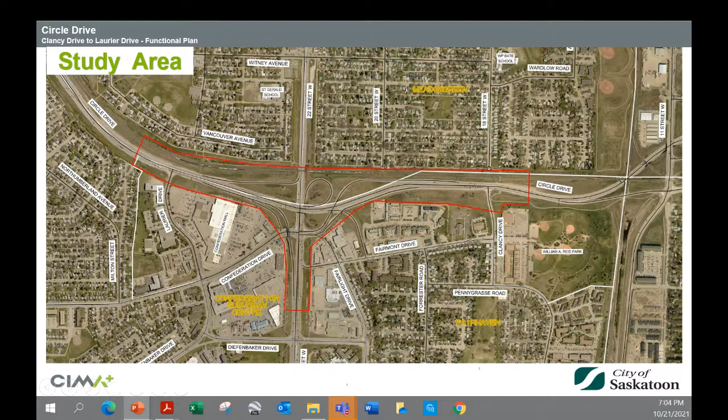So the open house purpose is obviously to present the recommended plan. We want to share some of the changes that were made following open house 2, where we presented a preferred plan, as we called it at the time, and to respond to final questions.

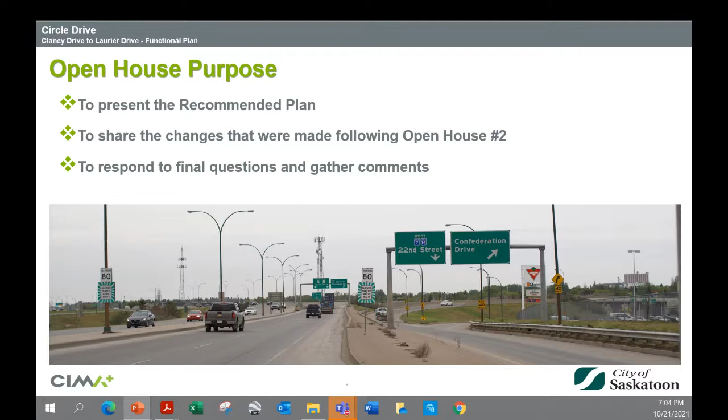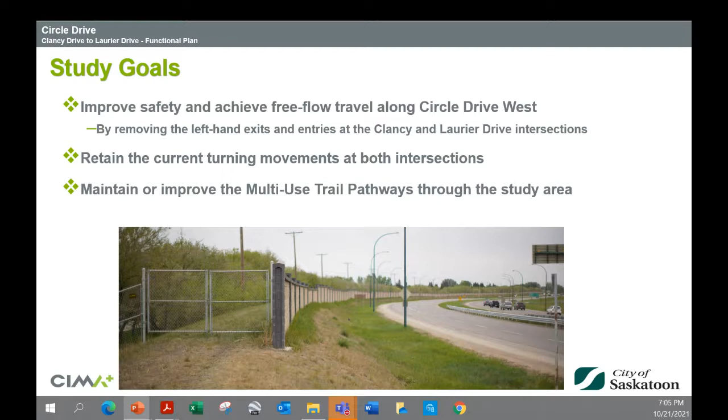And gather comments. So a reminder of the study goals: improving safety and achieving free flow travel along Circle Drive West. That would be accomplished by removing the left-hand exits and entries that occur at the Clancy Drive and Laurier Drive intersections. We wanted to retain the current turning movements at both those two intersections, and we wanted to, at the same time, maintain or improve the multi-use trail pathways through the study area.

So our study scope, what was involved in development of the long-term plan, and again, the freeway plan along Circle Drive West: upgrading the Circle Drive 22nd Street interchange, upgrading the 22nd Street Confederation Drive intersection, which is right alongside the interchange. Again, preserving and improving the multi-use trail pathway network in the study area.

And what got added to our work along the way was an interim change to the 11th Street interchange, because we had to restore a southbound access from Circle Drive. So we ended up extending a little bit towards the south.

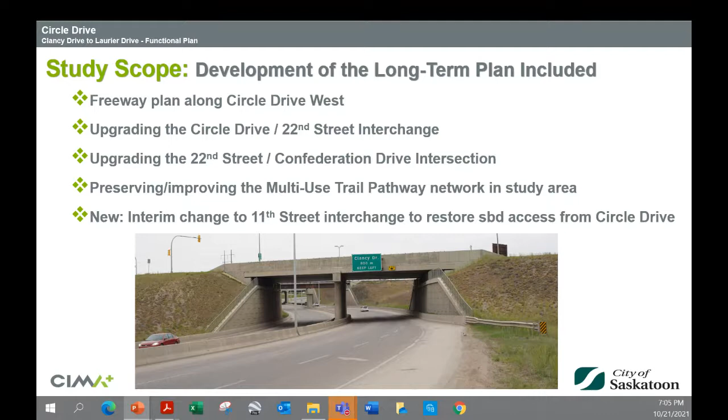Work that was not included in what we were asked to do includes the ultimate Circle Drive 11th Street interchange configuration. Although options have been considered by a separate city study, and we will show you what that looks like a little later on. The railway grade separations that would be necessary in and around the interchange area at 11th, and the 22nd Street Diefenbaker Drive intersection upgrading.

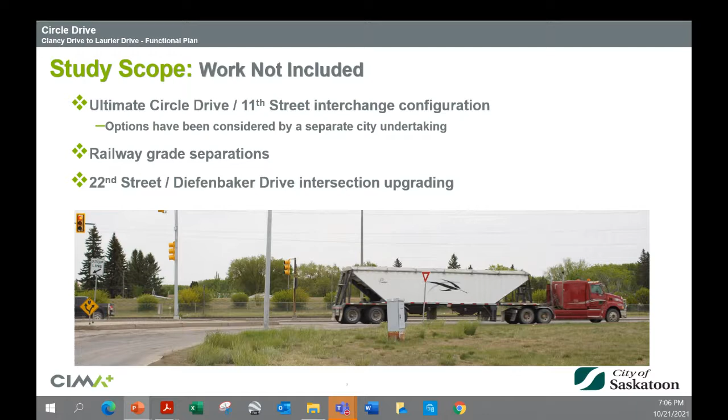So a little overview of the study process and timeline. This has gone on much longer than anyone would have expected.

Open House 1 was held in June 2019, where we spent time gathering the existing conditions and consulting with the community. Open House 2 in January 2020, we presented the preferred plan and invited public input in response to that plan. Then the unexpected part of our study process was the COVID-19 pandemic from March 2020 to September and still ongoing. A public engagement process was paused at that point. But the preferred plan was modified in response to the public input. And so here we are at Open House 3, presenting the recommended plan again, to respond to final questions and gather comments. This, if things can proceed, will lead to City Council approval in spring 2022.

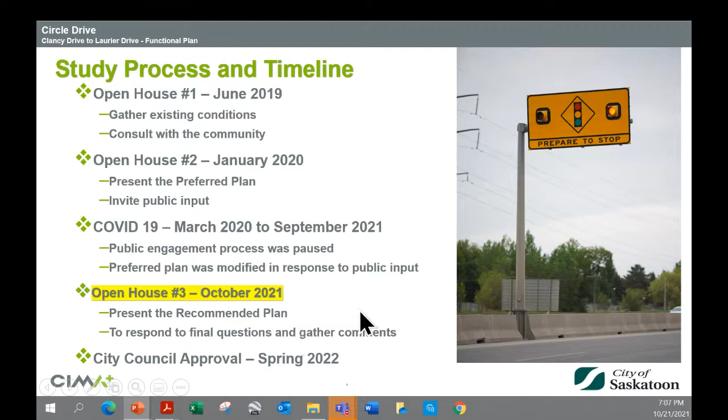So we'll start with some panels that describe the study background, starting with Circle Drive's overall role. It's a core route, an urban ring road in the City of Saskatoon's road network. It supports travel within and through the city. It will ultimately serve as a southwest leg of the proposed Saskatoon freeway. And as a ring road and freeway facility, it would normally only serve longer trip lengths. It's not meant to be a facility which you hop on and hop off, making short trips. Ideally, Circle Drive would only connect with key network roads if there was a do-over going on here, at 11th Street, 22nd Street, and 33rd Street. That's what that facility should look like as a freeway.

So again, study background. One of the things we had to consider was looking at what the traffic volumes might be in future planning horizons. So the future growth had to be considered in developing long-term system requirements.

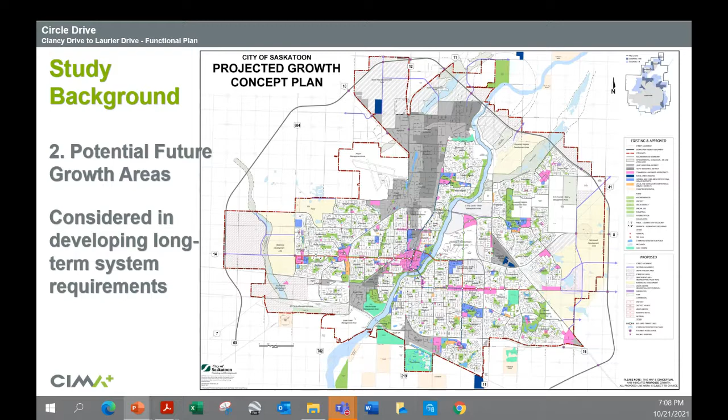And again, in study background, thinking about helping us understand what the freeway wants to be, what role does Circle Drive play again? So the future Saskatoon freeway, which is this outside line here, doesn't include a southwest leg crossing the South Saskatchewan River.

So 22nd Street, which begins outside the city as Highway 14, is one of several spokes connecting the future Saskatoon freeway with, in the case of 22nd Street, Highway 7 and 14, with the Circle Drive Ring Road. And so the point we're going to be making is that this connection is, for all intents and purposes, part of the ring road. Ultimately, there's only 3/4 of a ring road. So, with that, existing Circle Drive connects 7, 14, and 60 west, with highways 11 and 12 north.

Neault Road connects those same westerly highways with Highway 16 north. That's Neault Road right here. And Neault Road, 22nd Street and Circle Drive connect Highway 16 north, again up here, with Circle Drive, southwest Circle Drive, and ultimately again the other provincial highways.

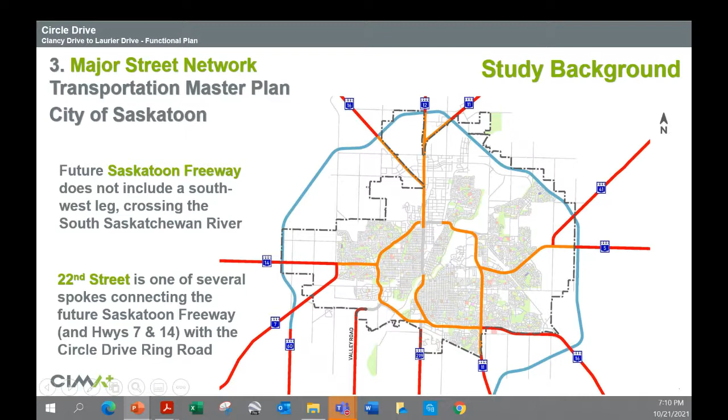And these same observations are documented on this panel, but I won't read them again. So although, I will go back and emphasize from a problem statement perspective, as we try to define what it is we're trying to fix, the highway network is what I just described for you. And these are the bullets I went through.

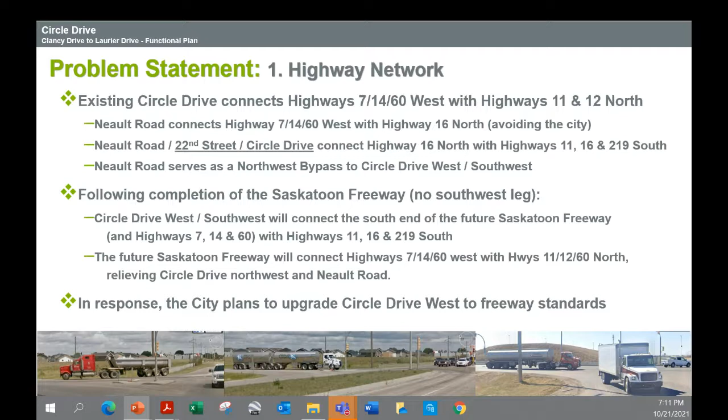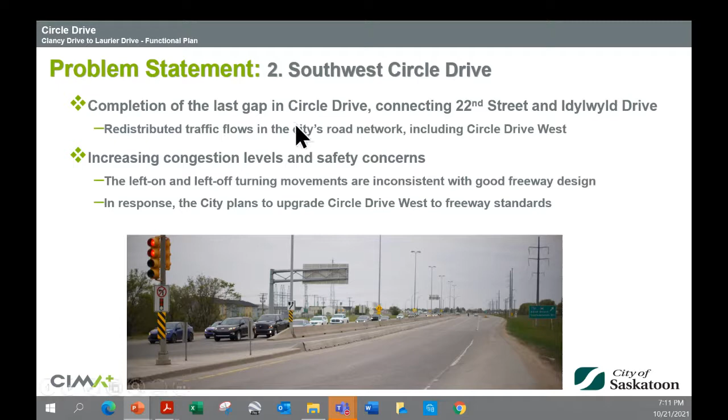So part 2 of the problem statement is Southwest Circle Drive. So it completes the last gap at Circle Drive, which the city undertook, connecting 22nd Street and Idylwyld Drive. That redistributed the traffic flows in the city's road network, which includes obviously Circle Drive West. So those increasing congestion levels and safety concerns, the left-on and left-off turning movements are inconsistent with good freeway design and becoming more problematic with the increasing volumes. And so in response to that, the city plans to upgrade Circle Drive West to freeway standards.

Now part 3 of our problem statement, focusing on the mix of the right hand, which are the freeway exits and entrances, and the left hand, which are the expressway exits and entrances. That can challenge driver behavior and lead to poor safety outcomes. It's where you will often find truck traffic in both lanes as they think about which side of the highway, which side of the roadway they need to exit from.

So then looking at the Circle Drive segments, what the design standards are today and what the approximate lengths of these sections are, starting with Circle Drive East, which is Highway 11 south of the river to 11th Street. That's already a freeway, that's 10 kilometers. From 11th to 22nd, we have a signalized Clancy intersection in between, approximately 1 kilometer. Crossing 22nd Street, we have an interchange, so that's part of Circle Drive that wants to be a freeway.

From 22nd Street to 33rd, in the middle of that we have a signalized Laurier, again approximately 1 kilometer length. Then crossing 33rd Street, again an interchange, again a section of it that's waiting to become a freeway. And then from 33rd Street to Idylwyld Drive, Highway 11 on the north, again signalized Airport and Avenue C.

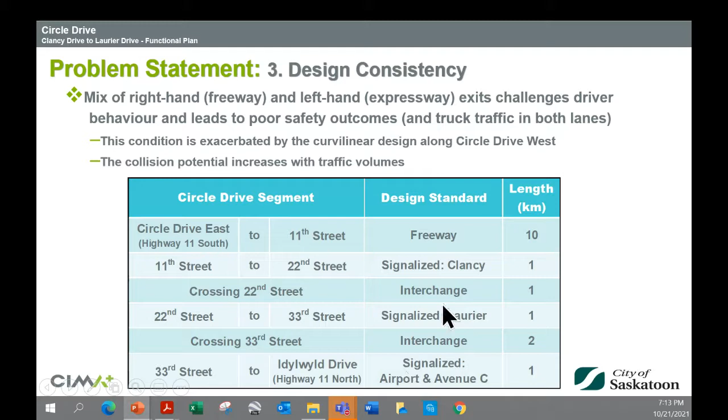So looking at some of the problem areas or constraints as they exist right in the study area. Let me just catch up here.

So first of all, the interchange spacing, where best practices would have interchange spacing from 22nd Street either to 11th, or 22nd Street to 33rd, that's where you're going to get spacing between 1.5 and 2 kilometers. But today we have 600 meters from 22nd Street to Laurier and between 800 and 900 meters to Clancy. So that certainly falls far short of what we would need to build a suitably designed freeway.

Cost-effective design here would simply close those 2 intersections. They would disappear, and again we'd have 11th, 22nd, and 33rd.

Again, the existing Circle Drive 22nd Street interchange configuration is unusual. If you come up 22nd, you follow a loop ramp, a very small loop ramp, to get you around to Circle Drive North, to the north side of the city. The return movement from Circle Drive coming southbound, you have a ramp which takes you straight onto 22nd Street. So the design of that interchange was configured for 22nd Street West to Circle Drive North, Highway 14, and 22nd Street to Circle Drive and the other highway connections.

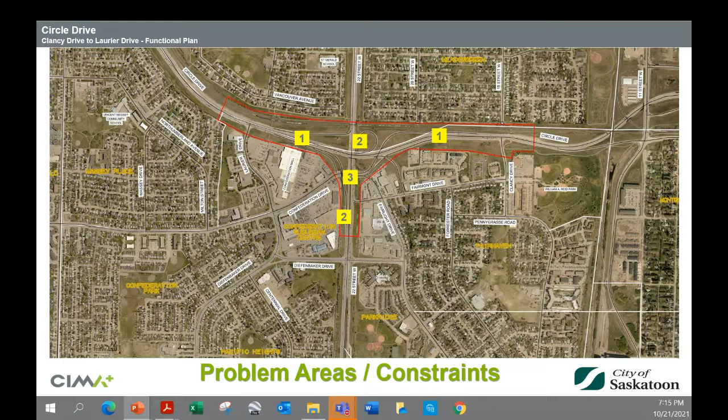So given the congestion here, one of the reasons why these two intersections are being used as they are is by local residents who are accustomed to the travel patterns they enjoy today. And so those were the bullets I just went through.

So now to define what we call the planning and design context for Circle Drive: design of high-speed roadways requires baseline geometric and safety standards, and those standards must be applied consistently to achieve best practices and the safety you need for a road like that. Circle Drive's design parameters are defined by its role in the city's overall network, as I showed you earlier. So Circle Drive must achieve the corresponding design consistency to be a safe facility.

So to achieve freeway standards and retain all current movements along Circle Drive, again two of the study goals come out there, would require highly complex and costly measures and would impact right-of-way requirements from adjacent businesses or residences, etc., as well as, or instead, the power transmission and CNR lines. So this is what impacts our study goals.

So we'll go back now and try to summarize some of the public input that we've heard at and following Open House 2. Probably one of the bigger concerns we heard was neighborhood access and egress and business access. So the concern there is reduced access at Laurier and Clancy drives, increasing travel times. And with that, a concern about revised business access to the west side of Circle Drive. Our response is that upgrading from expressway to freeway standards commonly results in changes in travel patterns, particularly when you see the very close intersection spacing we have along existing Circle Drive.

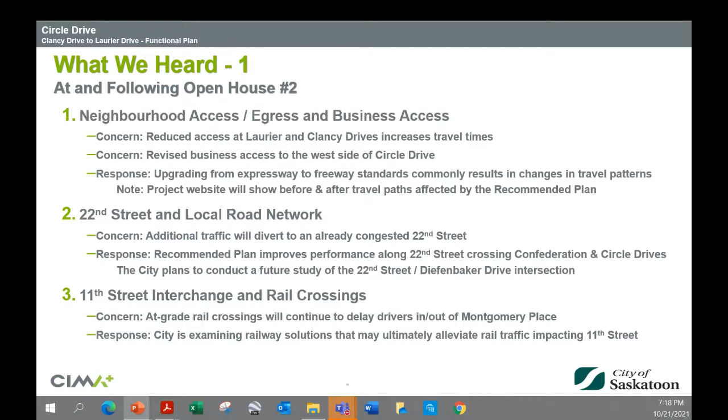Continuing with what we heard, noise attenuation was another concern, specifically improved attenuation for Meadowgreen and Montgomery Place, and possibly others. The response is that the city has asked us, CIMA Plus, to undertake noise analysis to identify locations warranting additional mitigation, and the noise study findings will be posted on the project website.

Another concern we heard was safety, involving opinions both for and against removing the two traffic signals, with concern that diverted traffic could result in busier school zones. The response is that the city will monitor traffic flows to ensure appropriate traffic control measures are in place where changes in flow create a problem of some kind.

Another concern was free flow Circle Drive, not too far removed from the safety concerns. Again, there were opinions for and against removing the two traffic signals to achieve a free flow facility, and opinions for and against upgrading Circle Drive, with challenges recognized that the city might face along Circle Drive North. The response is that the city will conduct future studies to assess Circle Drive North, but the need to improve the performance of Circle Drive West and its connection to the south does not hinge on what happens with Circle Drive North.

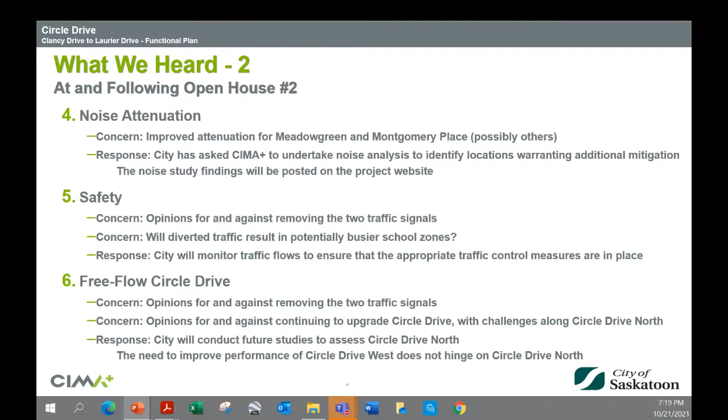Continuing with what we heard, emergency access was a concern—specifically, will emergency access to area neighborhoods be affected? Our response is that EMS input has been sought to ensure suitable access is maintained, so we're not losing sight of what that will require.

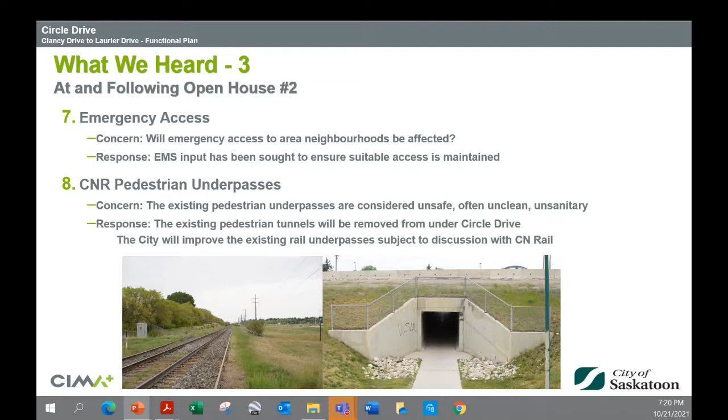Lastly, the CNR pedestrian underpasses. The concern is that the existing pedestrian underpasses are considered unsafe, often unclean and unsanitary. The response is that the existing pedestrian tunnels under Circle Drive will be removed by the recommended plan, and the city will improve the existing rail underpasses, subject to discussion with CN Rail. It wasn't something we could accomplish with what we're doing, as the overhead power lines prevent something extending across the road and rail at the same time.

So here's the previously preferred plan—this is what we showed you at Open House 2. The numbers on there correspond with some of the changes we've made since this plan was first shown.

If you follow the numbers on that plan: number 1, we've added a ramp from 22nd Street eastbound to Circle Drive southbound. This came to us as a request, as people brought to our attention the higher volumes, particularly with Nault Road and the truck traffic coming in from the west. This seemed like a prudent change to make, and this ramp utilizes the existing structures that are there today, so it was a fairly simple ramp to add. For truck traffic coming in from the west, it avoids the trucks having to go through the signal at Confederation, and they don't have to hit the signal at Circle Drive. So it's very efficient, and we think a safe improvement.

Number 2 is revised connections to Fairmont Drive from 22nd Street eastbound. Today you can come out of Fairmont Drive and go this way to the north. One of the problems drivers have experienced is a desire to make a left turn at Confederation, so different measures have been in place at different times to try to prevent that—it simply wasn't a safe weaving maneuver over far too short a distance. So this is now an exit from 22nd Street into Fairmont Drive, which helps replace the movement that no longer exists here.

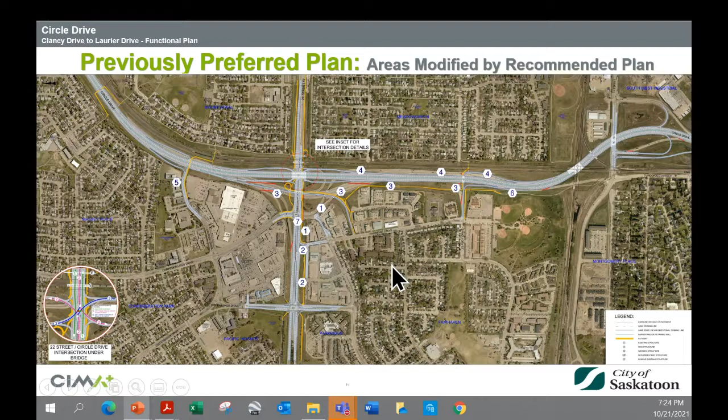And we've added a dual left turn from eastbound 22nd to northbound Confederation Drive, so it's a double left turn lane here. So those are the changes we made since Open House 2, and there may be some more subtle changes.

So starting with the recommended plan, this is one I'm hoping most of you have had an opportunity to look at, because it's been on the city's project website. And so this now reflects all of those changes I was just telling you about.

The all movement—for example, one thing I'll point out, it used to be that if you were coming down Circle Drive and wanted to go east towards downtown, you had to exit onto Fairmont and do what's called a jug handle left turn, come around here, and that's what this little ramp accomplished for you. Now you simply exit here and go this way.

And it used to be that this ramp took you over top of Confederation Drive. Now you simply make the right turn and you've got sufficient distance to merge to the left and make a left turn. And if you come off this way, this also used to be a connection directly to Confederation Drive. Now you make this exit and you have a dedicated auxiliary lane to take you straight into the mall. So it's a free flow lane sitting outside the core lanes. So that's just some of the changes that have happened here with this new design.

As well on this side, this ramp could no longer exist with the Clancy Drive on ramp—they overlapped each other, that wasn't going to work. So this is the change we've made. It's at 11th Street. You now have this loop ramp to exit onto 11th Street from Circle Drive southbound. And the on ramp moved a little bit, but the same maneuver is there.

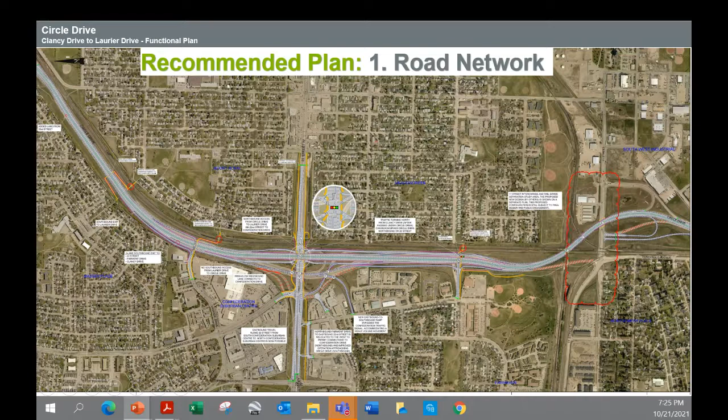So this is an update of the cross sections we showed you at Open House 2. Along the bottom we have three: cross section A is this one here, cross section B is on the next panel, cross section C is the third one. This shows you Circle Drive just south of Clancy. So Circle Drive goes over and Clancy Drive will go under. So these are the ramps you see traveling in both directions on either side, and this gives you an appreciation of where the road sits relative to the terrain around it.

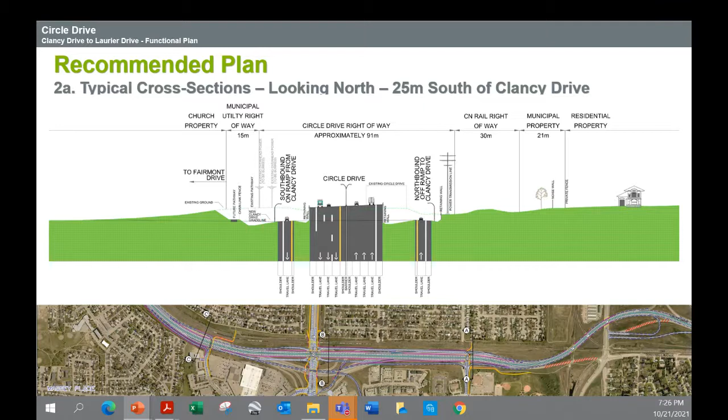This is the cross section just immediately south of 22nd Street, again through Circle Drive. Now you're seeing the two ramps on either side of Circle Drive, and these are the ramps that utilize the old bridges. If you look at this, you'll see that these lanes right here represent the lanes going over top of 22nd using the old bridges. This is where the interchange was. This is where the interchange will be today.

This is 22nd Street, Circle Drive just north of Laurier. Laurier goes over top of Circle Drive, and this is where we had to change some of the driveways because we're beginning to elevate. These are the ramps, or the CD roads, on either side that you're seeing. Again, it gives you an appreciation of power lines, CN rail right-of-way, and where the nearest house might be, and the church property on the other side.

So this is the future railway grade separation concept prepared by another team for the city. Here it comes off of, so north is to the top. This is 11th Street, swinging to the south. There's the ramps that we showed you being changed in our design. Now we're crossing over the railway lines and back onto 11th Street, and this is a connection to the local road, parallel to the rail line. So again, this ultimately would be how the grade separation would be accomplished for the rail lines, so that if you're exiting at 11th, you're not waiting for trains crossing the road.

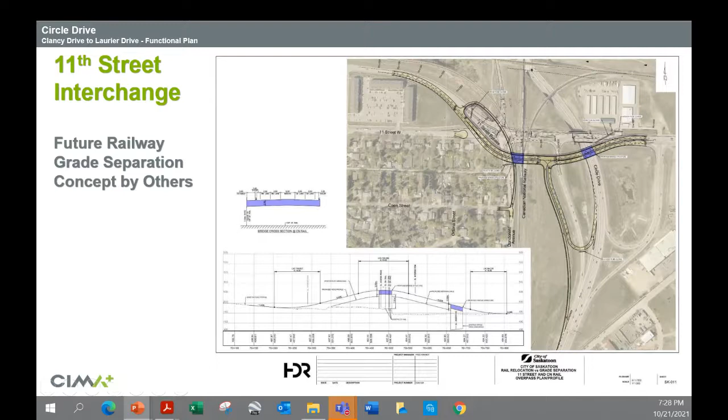So this shows you the multi-use trail pathways, and all of the brightly colored lines are all new portions of trail, beginning with the three pedestrian crossings. Again, there is already multi-use trail on this side, pathway on this side. There's now a new pathway here, new structure underneath this ramp, and then you cross under Circle Drive on both sides with the roadway, and then pathways on both sides. New pathway down here. This got moved because of Circle Drive, and we go under Circle Drive here. Where do they go? Under Circle Drive, and then we still have the railway crossing to be improved at some future point as the city engages with CN Rail.

And this one here, likewise, we go over top of Circle Drive, parallel along with the Laurier structure. Come back down, but we still have the old CNR crossing to contend with. And finally, the last one, long ramp to get up, across, back down.

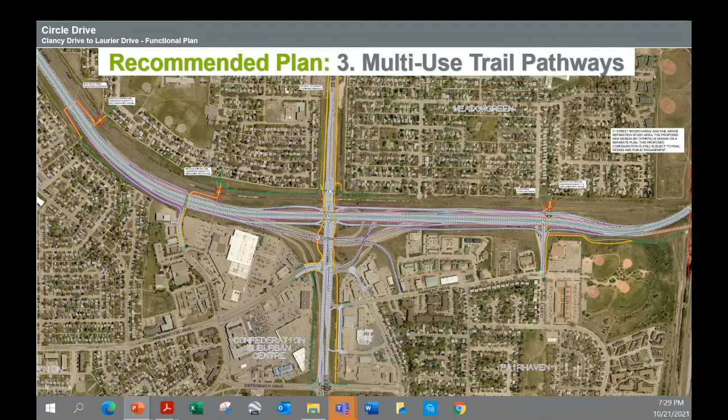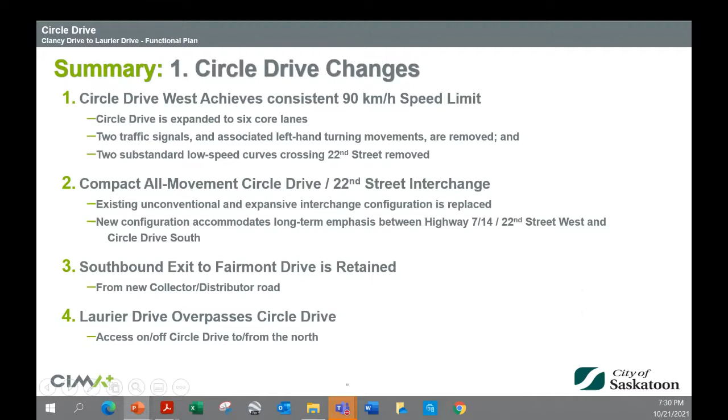Southbound exit to Fairmont Drive is retained from the new collector distributor road. The Laurier Drive overpasses Circle Drive, with access on-off Circle Drive to/from the north. Clancy Drive underpasses Circle Drive, all movements on-off Circle Drive, as well as a new access provided from eastbound Clancy Drive to 22nd Street eastbound via a CD road.

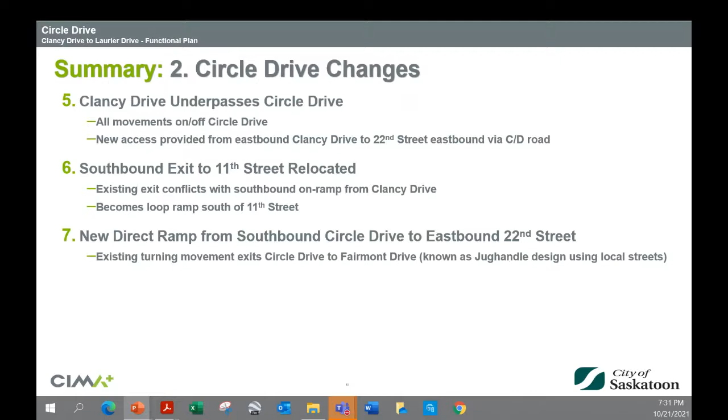The southbound exit to 11th Street, as we mentioned, has been relocated. The existing exit conflicts with the southbound on-ramp from Clancy. It becomes a loop ramp south of 11th, and then there's a new direct ramp from southbound Circle to eastbound 22nd. The existing turning movement exits Circle Drive to Fairmont Drive, which again is known as a jug handle design, and that disappears. That just becomes an access to the whole Fairmont area.

So a comparison now of 22nd Street, existing conditions.

So along 22nd Street, this section is still 4 lanes, 2 each way. This is now 6 core lanes, 3 each way, with all the auxiliary lanes. It's now, over here, 200 meters from here to here, as opposed to the short little jaunt we had here, about 100 meters. So that's an improvement. We have a T-intersection with Confederation Drive, and that's going to move traffic much more efficiently. It's not mixed in with other turning movements off and on the Circle Drive. Those are all here now. So again, a much improved design.

And then the single signalized intersections with the Circle Drive ramps, that is illustrated up here. This takes place, this signal is below Circle Drive as it crosses over top of 22nd. So you have this movement and this movement happening simultaneously. This movement and this movement happening simultaneously. And this movement exiting Circle Drive, and this movement exiting Circle Drive, happening simultaneously.

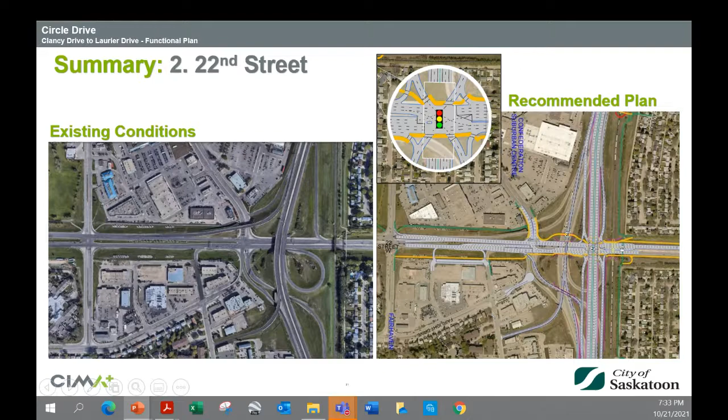So that's the summary of the changes at 22nd Street, a summary of the objectives. The recommended plan had to balance two objectives. We've achieved free flow standards along Circle Drive, so uniform 90 km/h posted speed.

That's the speed limit along Circle Drive. The design consistency improves safety by removing all those left-hand turning movements. And then when it comes to retaining the turning movements that we tried to achieve at Clancy Drive and Laurier Drive, all turning movements are off on Circle Drive, retained at Clancy.

There's a new access provided from eastbound Clancy Drive to eastbound 22nd via CD road. Access from Laurier Drive is to and from the north on Circle, so that is where we were not able to maintain all of the turning movements. Access from Circle Drive southbound to Fairmont Drive is retained.

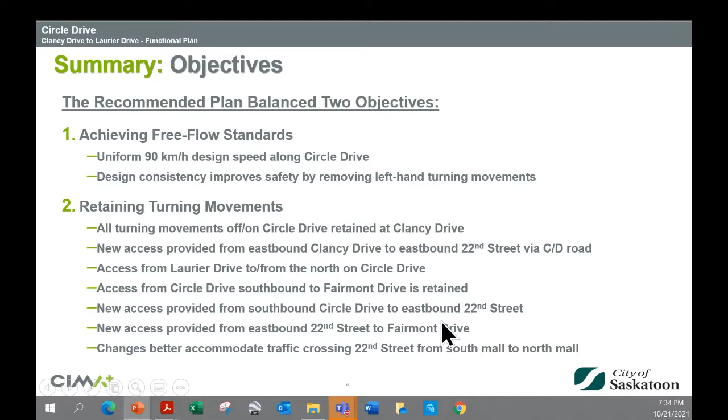New access provided from southbound Circle to eastbound 22nd. New access provided from eastbound 22nd to Fairmont. And the changes better accommodate traffic crossing 22nd from the South Mall to the North Mall, a movement that wasn't accommodated with the existing conditions.

Summary of the benefits: the recommended plan achieves improved 22nd Street roadway performance and safety, improved Circle Drive West performance and safety, improved system capacity and cross-city travel times, consistent facility design better meets driver expectations coming through the Circle Drive Ring Road, an improved multi-use trail pathway network and pedestrian safety, and the new configuration better supports Circle Drive's long-term role in the provincial highway network.

But now a summary of the chief concern that we have heard. The recommended plan did not resolve all the stakeholder concerns. One in particular stands out: the two traffic signals at Clancy and Laurier were retained by Circle Drive's original Stage 1 design to accommodate convenient local access. If the traffic signals continued to be retained, it would lead to increasing traffic congestion and safety concerns as traffic in the city and the surrounding region grows.

This will include traffic diverted through the city from the south end of the future Saskatoon Freeway's West Leg, as well as the regional highways. So Circle Drive's Stage 1 design unfortunately resulted in area residents and business owners relying on what are now long established but intended to be interim travel patterns.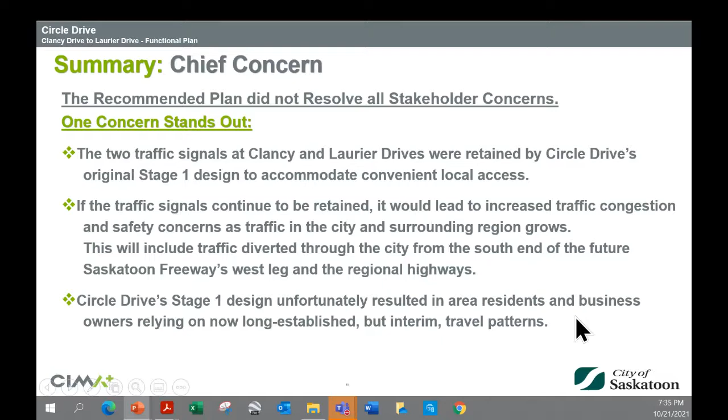So again, the recommended plan is long-term. Removing the signals after these many years will change the routes in and out of some neighborhoods and business areas, and is considered to be disruptive by affected drivers, by some of the stakeholders that have provided us with feedback. Upgrading Circle Drive West to free flow standards is considered a long-term project by the city. The city hopes that preparing the plan at this still early stage will give area residents and business owners time to adjust their plans where possible before the changes are implemented.

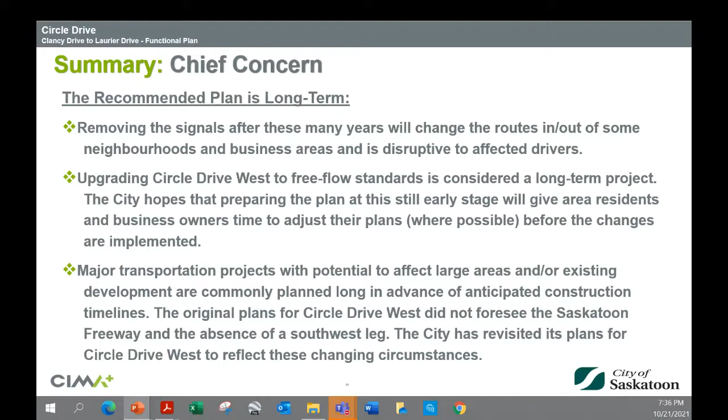Generally, major transportation projects with potential to affect large areas and/or existing development are commonly planned long in advance of anticipated construction timelines. The original plans for Circle Drive West did not foresee the Saskatoon Freeway, nor the absence of the southwest leg. So the city has revisited its plans for Circle Drive West to reflect these changing circumstances.

So a summary then of city commitments, what the city still promises to do to consolidate the long-term plan: noise assessment along Circle Drive West, the 11th Street interchange upgrading and associated railway grade separations, 22nd Street and Diefenbaker Drive intersection upgrading, and improvement of the railway pedestrian underpasses subject to discussion with CN Rail.

And I can answer that question. Or Shaliza, do you want to answer that question? Sure. Hi everyone, my name is Shaliza Kells. And Chelsea, feel free to add on if you want to. But those are great points, and I could say that that's definitely something that we'll need to look into as we get further along this design process.

Right now, we're just at the functional stage, and when we get to the detailed design stage, we'll definitely have to look at that. We'll probably end up doing what's called a CPTED review, which is crime prevention through environmental design. All right. Thank you, Shaliza.

Can you still hear me? Sorry, my screen is gone. We still hear you. Oh, okay. And I can still see you in the corner of my screen. Okay, I'm having some technical difficulties. I can still read the questions, so I'll continue to do that, but just so you know, on the back end, I can't see anything but the questions. So the next one is,

Let's say the city expanded west with an enlarged Westview, Hampton Village, Dundonald, and Kensington neighborhood. 33rd Street, the main east-west access, remains a 2-lane street. Along with increased numbers of trains, their length, and their reduced speed, there can be considerable waits on 33rd, both eastbound and westbound. Did your plans consider recommending a rail underpass for 33rd Street immediately east of Circle Drive?

I'm just going to post a link to the original rail relocation versus grade separation report in the chat. So that should be there. There were several reports on that project that went forward, so there's quite a few, but that was the original. Anybody who's interested in any additional information, you could email the address that I posted, cdwfps@saskatoon.ca, which is also posted in the chat.

So the third question from this particular resident: the existing sound attenuation wall on the west side of Circle Drive between 33rd Street and Laurier Drive is ineffective and does not appear to ever have been completed. Parts of it were built on the downslope, reducing its effective height. The height is insufficient, varies drastically between adjoining structures, and it is aesthetically unpleasing. No other city sound barrier looks this bad. Given your plan will add an extra lane between 33rd Street and 22nd Street and the accompanying noise as part of this project, will the sound barrier be completed to a useful height?

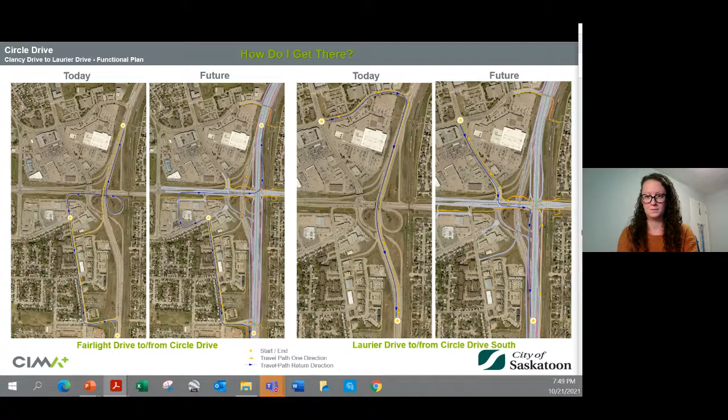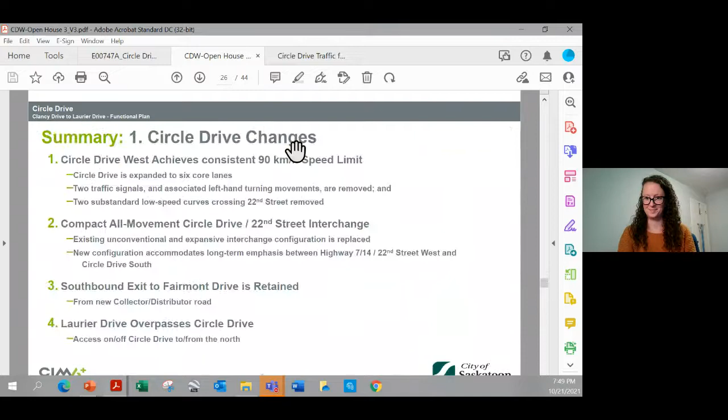Let me, I did prepare them. So this is Laurier. What I'm going to show you here are some of the travel maps we prepared, updated to reflect the recommended plan. This is Laurier Drive to and from Circle Drive South. Bear with me, this is a PDF of the presentation, a little more convenient for me to drill in here. So this is the Laurier Drive connection to existing Circle Drive.

As pointed out by the question, currently you can get off and on to the south on Circle and from the south on Circle. When that changes, you're still going to be able to use Laurier to go to and from the north. But now if you're anywhere here in Laurier, you're going to have to follow Confederation, and here's how you would get onto the south. If you're coming from the south, you'd exit here and go this way. From a travel length perspective, I would argue it's not a longer trip, you're just going to have to move through here.

Our traffic analysis tells us this is still going to be a good functioning piece of 22nd. It's going to function better than what you see there today. Once these new patterns establish themselves, once the city has had time after making these improvements to monitor traffic flows and tweak the signal timings, we're confident this is going to be a pretty efficient connection. Again, this is simply because we've only got 600 meters here. Freeways are never intended to have connections with that kind of spacing. That's as much as I can tell you, Chelsea.

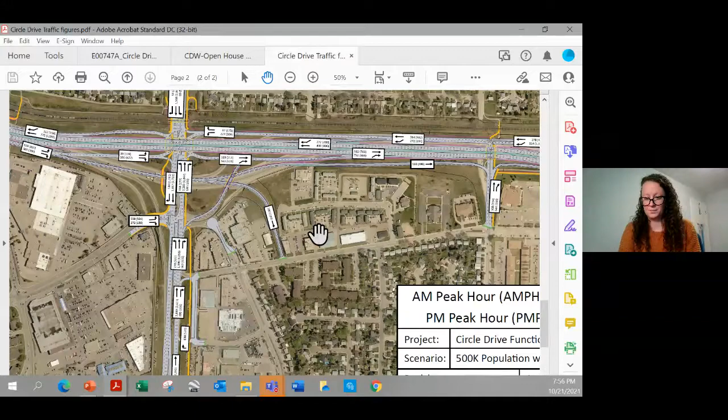I'm afraid what I brought with today was, just in case it was a question about traffic, but what I have are the future volumes, I'm afraid I do not have the current volumes. So I can't tell you what it's doing today. So therefore, you don't see the movements here in the diagram that I have on the screen. So I can't tell you what's there today. This has reassigned all those volumes in the network. Those are missing here, they are now elsewhere. So unfortunately, I can't help you with that.

Yeah, it's just to add, a large part of the assessment was about safety, and one of the outcomes of our study was that movement couldn't be completed there, so the trips have been assigned elsewhere and the appropriate analysis performed.

Sorry, I'm just having a little bit of technical difficulty here. Number 5 is the issue. This has not been addressed, and the impact to the mall and local community is huge. I'm not sure what number 5 refers to. So if that was your question, maybe just a clarification, and then we could answer that. So I'm just going to move on to the next one, since I'm not quite sure what that one's about.

What does the grade look like at the 11th Street exit? I'm not sure if this is referring to the proposed exit or the existing. I'm not sure. Does anybody have an answer for that or can interpret what that means?

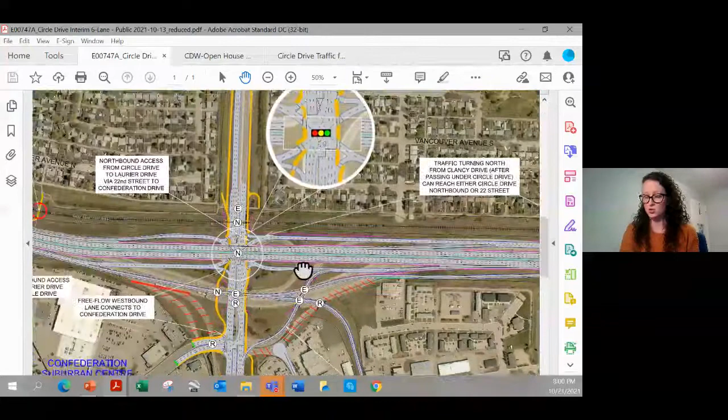The next one: we've asked to see a specific plan for the mall exit and entrance on Laurier Drive, and we still have not seen this. I can answer this one. At this time, we're not planning any changes to the driveways at the mall, and that's probably why you haven't seen a plan showing any changes.

So the next one: traffic will have to travel farther down Circle Drive to access 11th Street. Correct. Okay. We've already answered that one once.

The next one: I think almost everyone in the city will agree that Avenue C at Circle Drive is the main issue in the city. When will you tackle this? Shaliza, did you want to try and answer this one? Sure, currently we don't have a plan for when we will be tackling that.

I would ask that the person who posed that question have a look at our transportation master plan. In that plan, in the appendices, there is a prioritization list that lists all of the city's projects in order of how they're prioritized, and you'll find that project is pretty high on that list. Thank you, Shaliza.

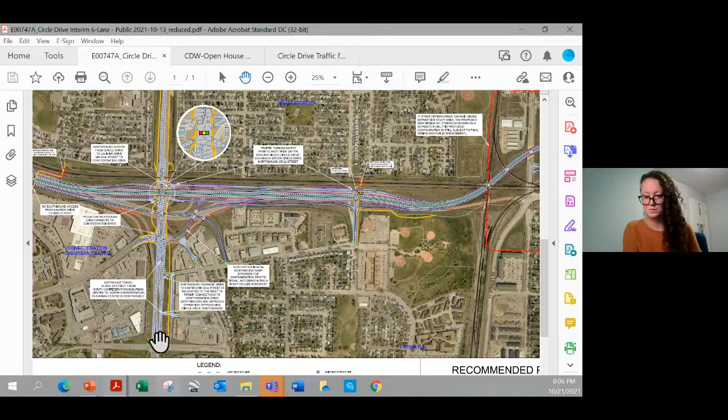The primary movement for traffic crossing through this segment of the city is coming from Circle Drive or going to the South Saskatchewan River crossing, the provincial highways on the south side of the city. They now come through here, don't have to stop at signals anymore, and can even exit and avoid this signal, making this turn if they're coming from Highway 14 or Highway 7 into the city.

Again, they've got a free flow turn, taking them onto Circle Drive southbound. This is going to be overall better able to handle truck traffic, let alone all kinds of traffic. This is simply going to be a free flow facility now, with better movements on and off 22nd, if we accept that this is going to become the primary movement now. Thank you.

Okay, the next one: will any feedback from tonight be considered before the plan goes to the city committee?

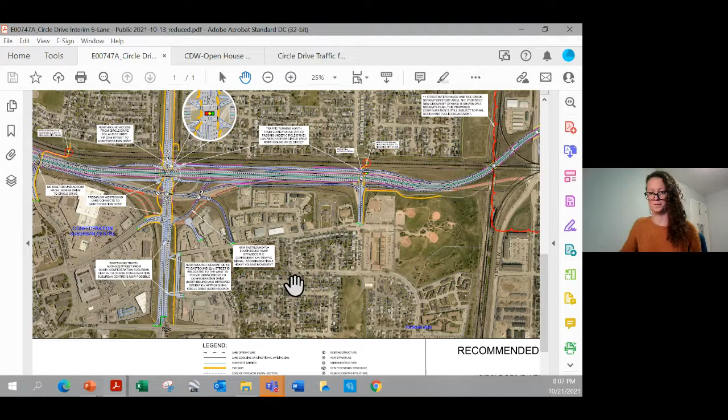Thanks so much for that comment. Obviously, we're having this open house to gather everybody's feedback on these plans. The plan going forward, as Chelsea outlined, is we're going to take all of these comments and all of this feedback and draft up a report to present to committee. So that's how we plan to use all the comments we're getting from tonight. Thank you, and as mentioned before, that's anticipated for this coming spring.

The next one: why not allow Fairmont Drive to access the off-ramp to take Circle South? Fairmont is a larger road and could handle the traffic. Let me hand that to Henry. Could you repeat the question? I'm trying to understand what it's asking. Fairmont is the east-west road parallel to 22nd here. So again, why not allow Fairmont Drive to access the off-ramp to take Circle South?

It's about the routing. If we tried to do that, we'd have more conflicts. What we've created now is a facility that respects best practices. We've got an interchange facility and all of its connections, and we've cleaned up what's going on here, so this performs better at Confederation on 22nd. Is it conceivable to put a ramp off here? It's not something you want to do — you want to separate movements from a local road to a freeway ramp. That's not something best practices would support, so it's not something we'd recommend as part of our design.

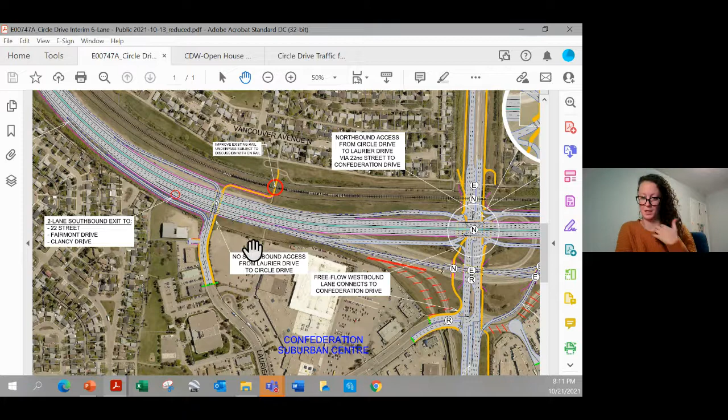As a pedestrian or cyclist, where would I cross from Confed Mall to the Tim Hortons on Fairmont Drive, or from the North Mall to the South Mall?

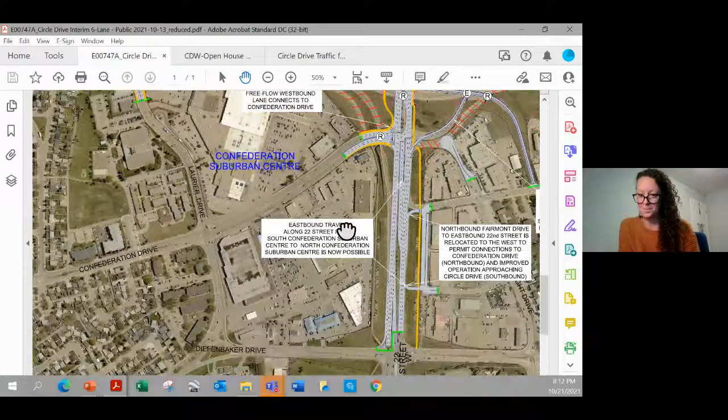Let's bring up the pedestrian plan and give that one a whirl, Henry. Yeah, you can see that here as well. Pedestrian traffic from here to here will have to use Diefenbaker unless there's some future overpass in mind, but there is no crossing here that I can tell. Wait a minute — let me just try to remember what this would provide here.

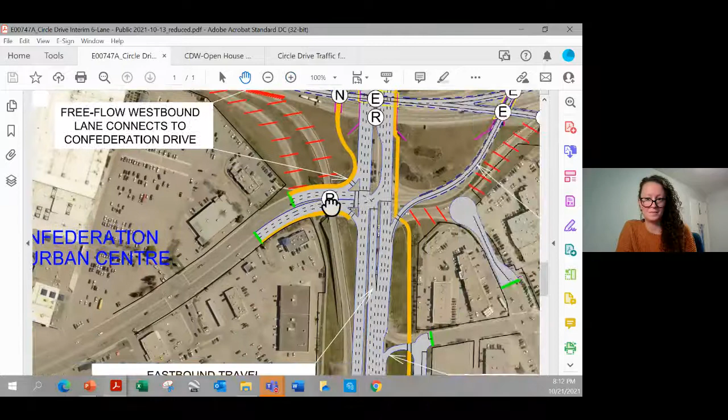Yeah, I'm not convinced that's an option. This is where I'd like to bring Jack Nipsu up. He has a better appreciation of what this urban signal might accommodate, but it will also have an impact on the efficiency of the signal timing. Jack, are you still with us?

Yeah, I'm here. So I think it's one of the things we'd have to look at with respect to signal timings. Conceivably, it would be possible to have a pedestrian crossing on the west side of that Confederation Drive interchange. So I think there's an option there, but it's something we'd have to look at in terms of what impacts that would have, as Henry mentioned, on signal timings and operations of that intersection itself.

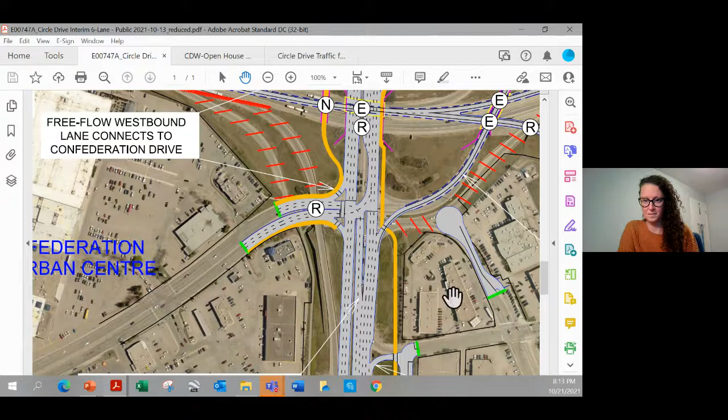Thank you, Jack. Okay, so I hope that answered your question. I think we already answered that one.

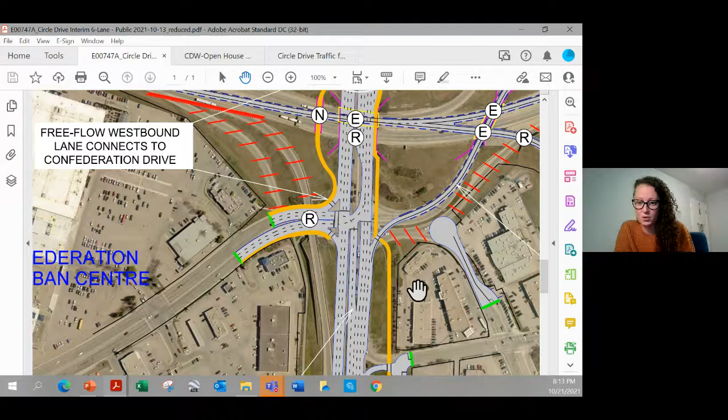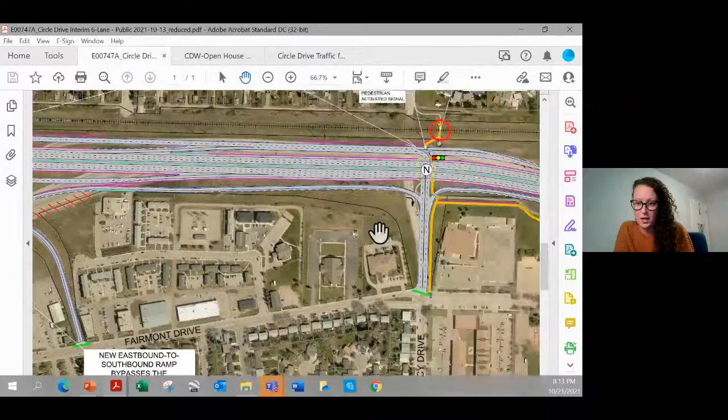Okay, I live in Montgomery Place. Removing the Circle Drive exit to 11th Street is a terrible move. Currently, the only relief we have to get into Montgomery when a train is traveling westbound is 11th Street. The proposed plan asks us to continue on Circle Drive south and loop back to 11th Street. If a train is traveling west to Chappell Yards, we will have to wait at 11th Street for the train to clear. How is this helping us?

I think this is kind of a two-part question. The first part about moving the ramp onto 11th Street, I'll send to Henry. And the second one about the train, maybe I'll send to Shalise. So we'll start with Henry.

Yeah, so if we look at Clancy, now that this is becoming a freeway, the signal is gone. What the traffic signal did was alternate which of these movements had priority. So if you had traffic entering or traffic exiting, they weren't necessarily occurring at the same time. But now that this becomes a free-flow facility, people just turn right and on they go. You cannot have an off coming through here at the same time.

And second, together with that concept we showed regarding this interchange here, this for us is the concept for getting this movement moved to a loop ramp, again a conventional interchange design, but then this would be part of what Shalise is going to describe, ultimately what happens with the whole interchange here. And the timing of this upgrading and what happens here, are they happening in tandem? That I don't know, so I'll leave that aspect to Shalise.

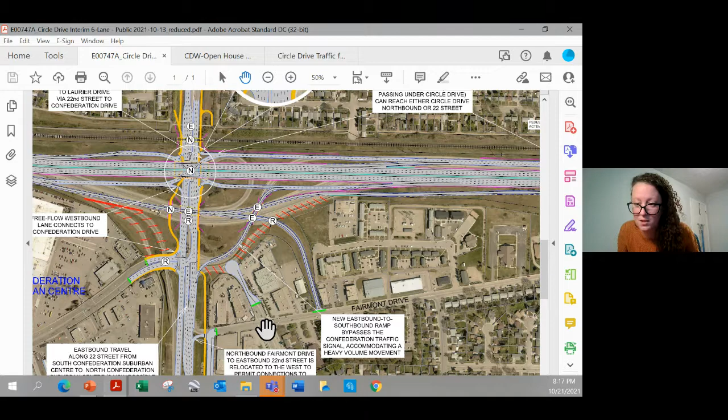22nd Street westbound, wanting to exit onto Fairmont or Circle Drive southbound, access seems to be removed, as well as access from 22nd Street westbound to access Fairhaven. Parkridge Montgomery appears to only have one access with the proposed changes via Diefenbaker. This will be very congested with having Diefenbaker as the only access to these three communities from 22nd Street westbound.

Don't quite see a question there, so we'll take that comment into consideration.

The next question is about consideration for truck traffic southbound on Circle Drive. I'm not sure exactly what the question is about, but Henry did mention a route from 22nd Street onto Circle Drive southbound for trucks traveling in from the regional highway network.

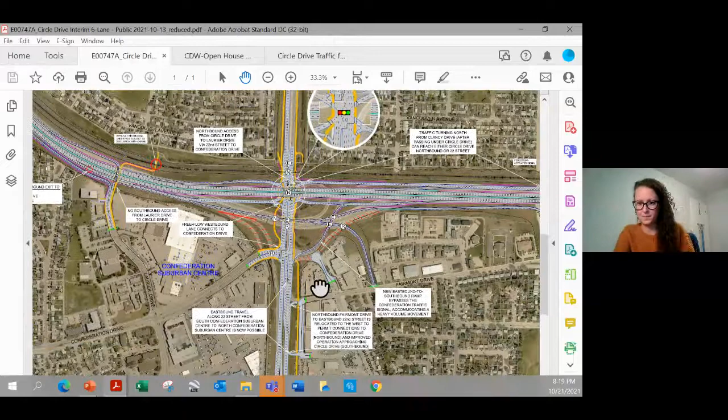Did you want to go over that piece again, maybe, Henry? It's very similar to a question we answered just a little earlier. If we assume that this, contrary to what's happening today or what did happen until the southwest Circle Drive was complete, this used to be the heavy movement. This now becomes the heavy movement, we think.

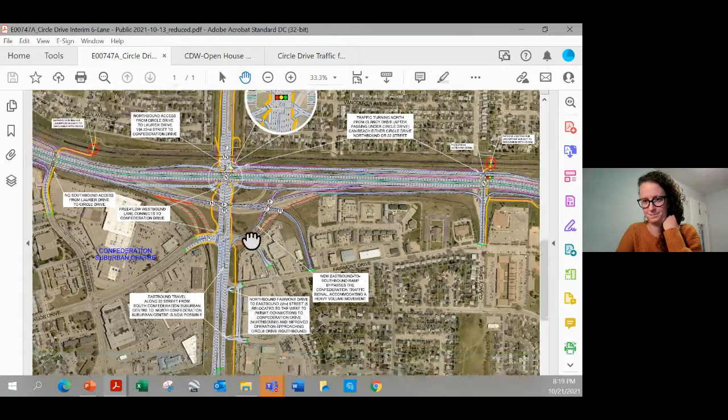So trucks can turn right, avoid both the Confederation and Circle Drive signals, and make a right turn. That was one of the issues a stakeholder brought to our attention, so we were glad we could fit that in using existing structures. The return movement, they will exit, not hit the signals at Clancy, and make this left turn and go southbound. Again, this operates more efficiently than it does today, and this will by nature be an efficient traffic signal operation. And the city still has to look at what it's going to do with Diefenbaker.

Perfect, thank you. Thank you, Henry.

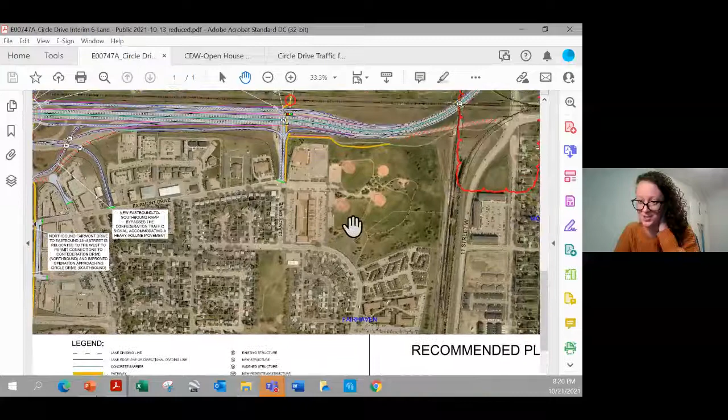The next question: does the current plan ensure compliance of NFPA 1710 fire protection into Montgomery Place? I'm not sure if we have a specific answer to such a specific question here tonight, but I can answer that Fire and Protective Services is one of our stakeholders, and they continue to be involved on large-scale transportation projects such as this.

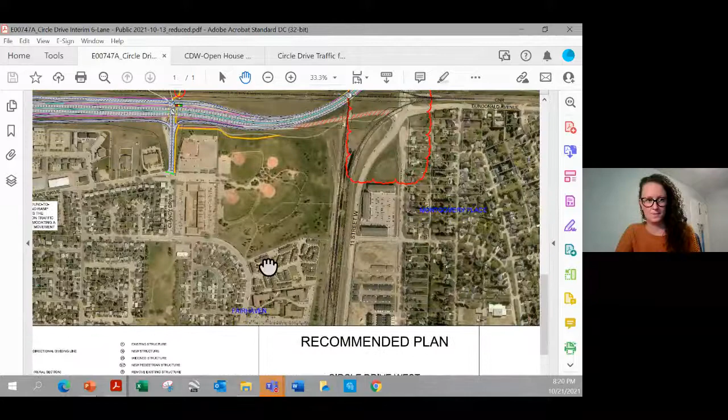Did anybody have anything to add, or should I move to the next question? What I would add is this plan simply can't be viewed in isolation. It's got to be viewed together with what's going on here. And the city's going to be, as you said, speaking with the emergency services people, and so they will have a say in what this implementation plan ultimately looks like, so that they are not having their response times compromised.

Perfect, thank you. The next one: is the Clancy Drive exit going to be an underpass? Yes, it is.

The next one was a comment: I'm just hoping the plans don't involve closing either Clancy Drive or Laurier Drive. Happy to let you know that we're not planning to close either completely. I'll move to the next one.

Any thoughts to allow access between Fairhaven and Meadowgreen at Clancy Drive and 11th Street West going under the rail tracks? I'm not sure that was included within the scope of this project, and I'm not sure how to answer that question or who to send it to. Shaliza, maybe? Yeah, thanks, Chelsea. I guess I would say that wasn't a goal of this plan. We were looking specifically at Circle, focusing on Clancy and Laurier. So no, that's not something that we did consider.

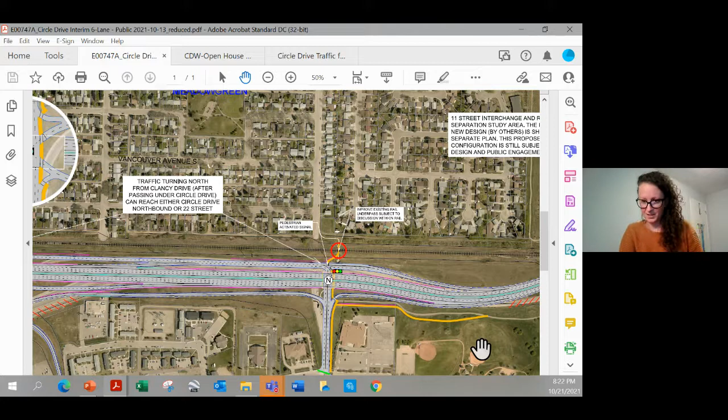Thank you. Already answered that one.

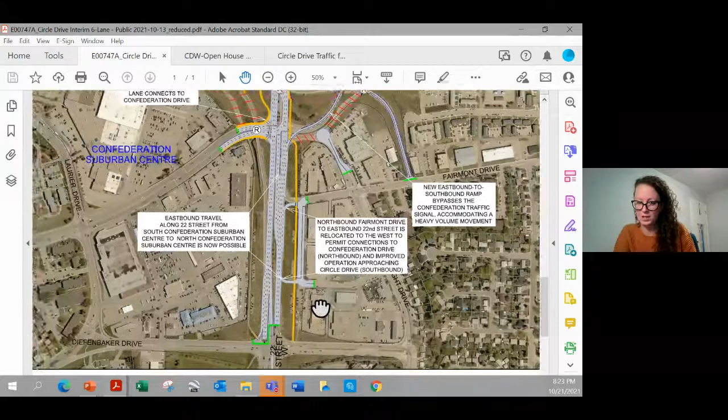Was any consideration given to people who travel between West End areas like Park Ridge, Fairhaven, and Pacific Heights and downtown, particularly during peak traffic times? I'll throw this one to Henry. What I can add is we looked at what the city's traffic model had to tell us about the volumes in this area and what was on the existing system, and then those were reassigned to the new system. The city then ran their volumes based on what our network then looked like with the changes in it. And so the performance that we measured in the road system based on the reassigned volumes, I can only assume that is the answer to the question that's been asked.

Yep, I think it is. So yes, all of those trips from that neighborhood essentially were included in the analysis, is kind of what I heard. Yeah, to the extent that those trips were represented in the volumes we saw along the corridor we're studying. Perfect.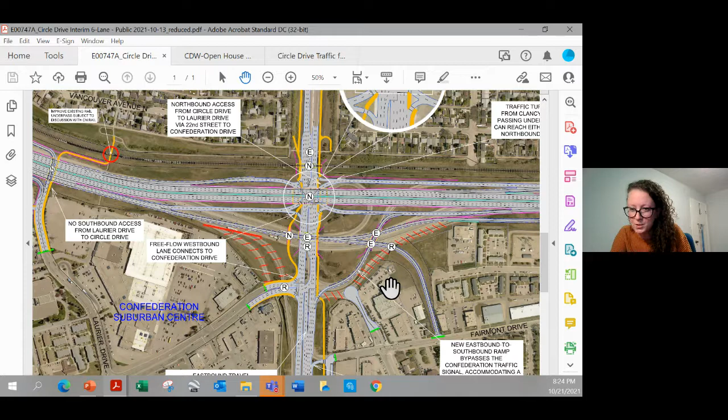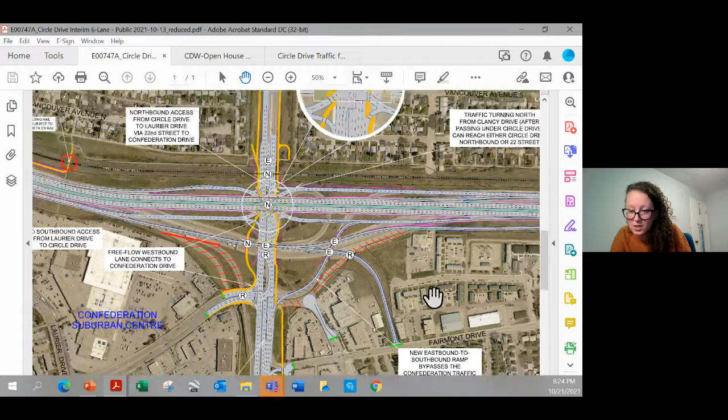The next one: open house number 2, memo number 7, miscellaneous concerns states a possible reduction in access for emergency responders. Is this referring to Montgomery? What has been done to address this possible reduction? I think we have answered this question previously, where we're always talking to our emergency response teams, and we'll continue to speak with them in the rollout of this long-term plan.

Shaliza or Henry, anything to add? No, I don't. I think we've addressed that a couple of times, and you're staying in contact with EMS, and as you develop plans that get closer to implementation, you will continue to make sure they are satisfied that they can get around with the response times they need. Yeah, nothing to add from me, Chelsea. Okay.

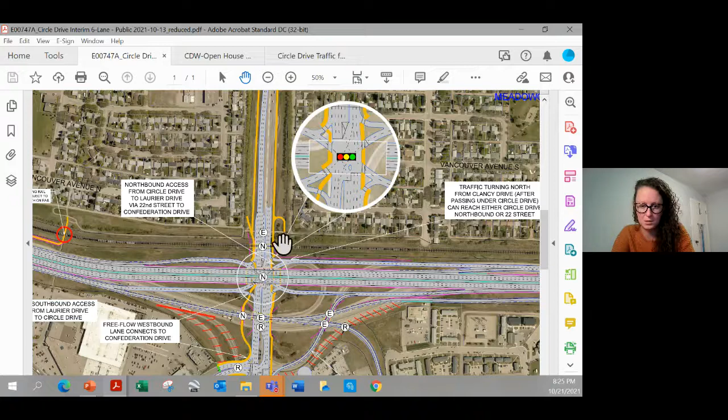The next one is the pedestrian overpass crossing 22nd Street just east of Circle Drive West going to remain in place? I'll pass that one to Shaliza maybe. Or I could answer that it wasn't included in this project and it's planned to remain. As far as our roadway upgrading, it doesn't have to impact it, so it's unchanged. Perfect.

The next one is just a comment. Why are we so concerned about connecting Fairmont Drive? Folks can easily head up Fairlight, go down Diefenbaker, and turn onto 22nd. The original on-ramp should be gone to begin with.

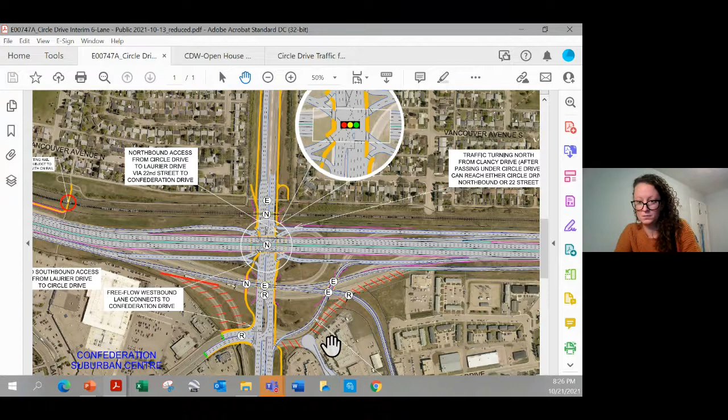I'll pass that one to Shaliza. Hi, yeah, again, as Chelsea said, we've talked about this, and we unfortunately don't have a timeline at this point. The rail relocation versus grade separation study was presented to City Council in March of 2018, and that was the concept work that was shown at tonight's presentation. I believe Chelsea will be posting some additional information and links for you if you'd want to read up on that a bit more.

Thank you, Shaliza. I'll just reiterate again that project is on the infrastructure priority list for transportation within the Saskatoon Transportation Master Plan, along with all other projects citywide.

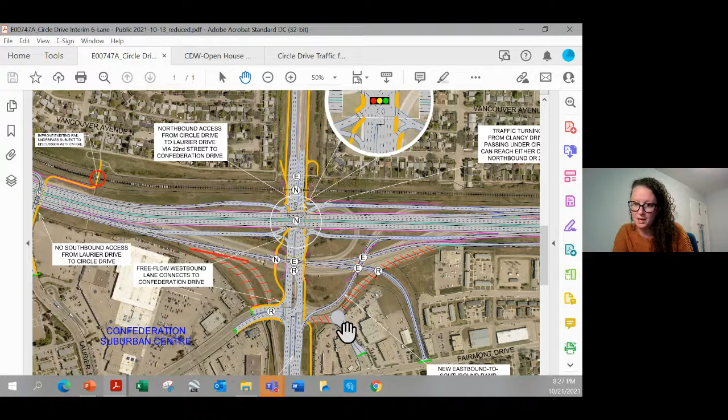Next question: why can't another lane be created from Clancy Drive to 11th Street to retain the 11th Street exit that is currently there? Pass that one to Henry.

Yeah, I think we've probably answered this one a number of times. Now that this is a free flow facility, we do not have traffic signals which alternate the movements. Now this movement has to enter, and it cannot do that at the same time as we have another high-speed movement trying to exit. So this takes precedence, and this got moved here. Ultimately the city's plan for this interchange will probably modify this, but that'll take care of the grade separations.

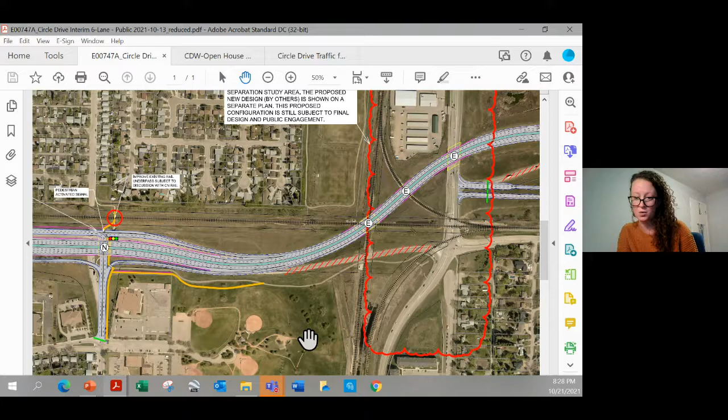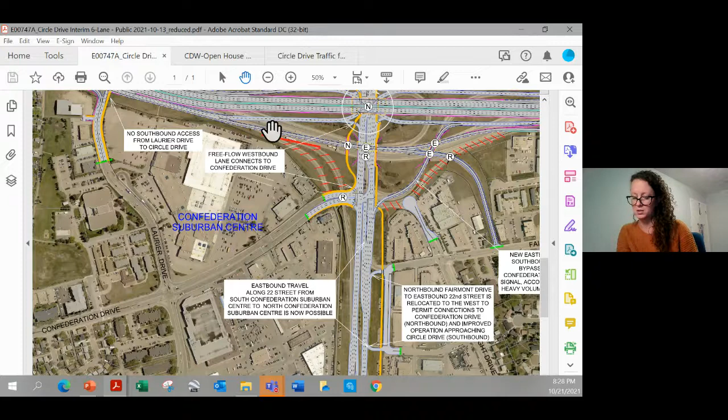Next one, how much more time would that trip take with extra lights getting from Laurier onto southbound Circle Drive? I'm going to pass that one maybe to Henry. I'm not sure if we have an answer for that. Yeah, I don't know that we have time. Let me...

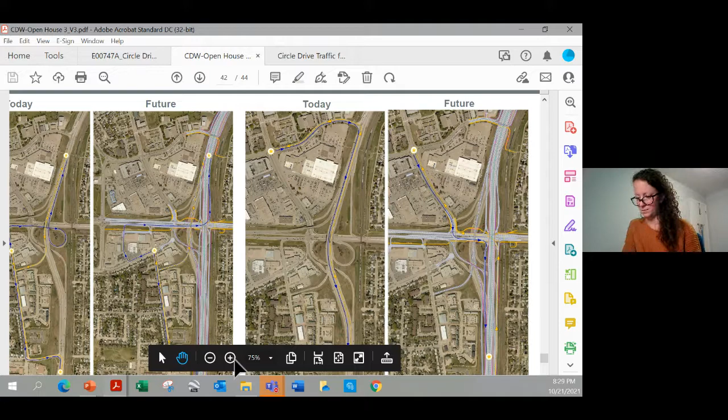There we go. So this is Laurier Drive. I'm looking at the right ones here. Wait a minute, here we go. So if we look at this intersection of Laurier Drive and Confederation, I think we mentioned it a minute ago. We're not convinced that this is going to have a bigger impact than what exists today.

So here are the current movements to and from the south at Laurier, and now they're going to have to go this way. As far as distance is concerned, it's not an increase, but they're going to have a left turn and then a right turn. Once this is being built, the city's going to be looking at these signals being this close together, so they're going to be coordinated. This could be, I'm going to guess, almost as efficient as what you see here. Okay.

We're coming near the end of our time. I know that I have about 45 things here that haven't been answered yet. So we'll do our best to go through these questions after tonight's presentation and post some information to the Engage page on them.